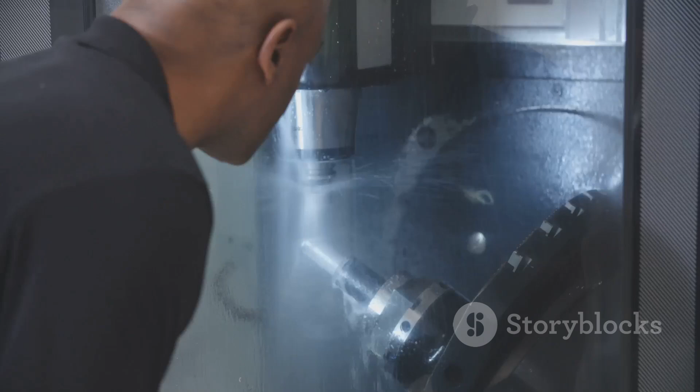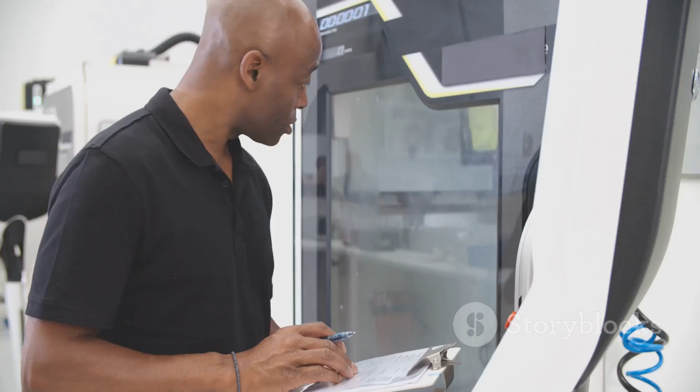Let's talk about CNC machining. This technology is amazing. We can create incredibly precise parts from digital designs, but even the most advanced CNC machine is only as good as the instructions it receives. That's where clear, accurate technical drawings come in. They are the language we use to communicate our design intent to the machinists who bring our ideas to life.

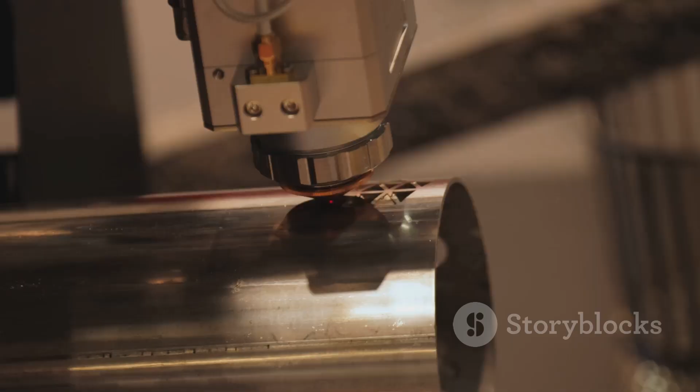Think of it like this: you wouldn't build a house without a detailed blueprint, right? The same goes for CNC machining. A clear drawing is the blueprint for your part. It tells the machinist everything they need to know to make your vision a reality.

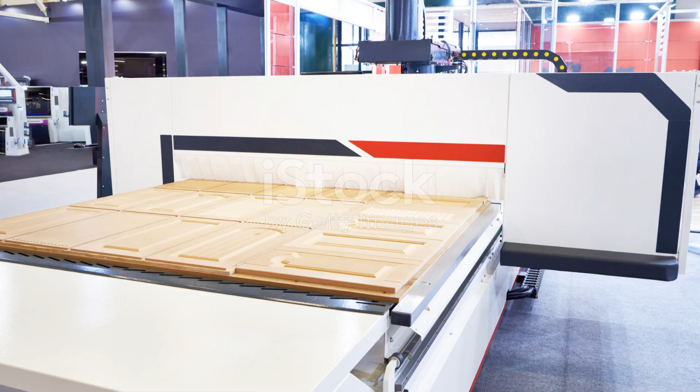A well-crafted drawing ensures everyone is on the same page, from the engineer to the machinist. This shared understanding is crucial for preventing errors, reducing waste, and ultimately, saving you time and money.

Imagine this: you've designed an awesome new product. You've spent hours, days, maybe even weeks perfecting it in your CAD software. You send the drawings off to the machine shop, excited to see your creation come to life. But when the parts arrive, they're not right.

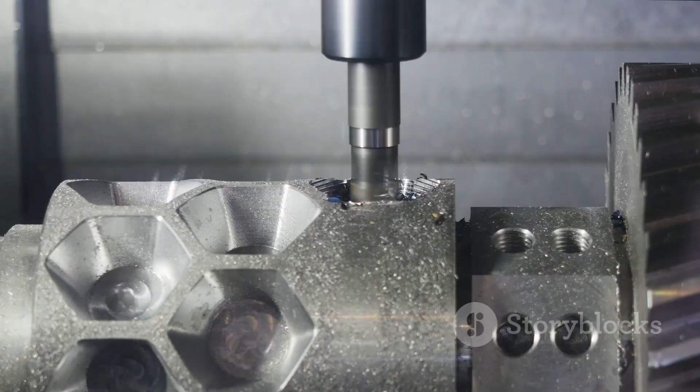Something is off. Maybe a hole is in the wrong place, a dimension is incorrect, or the finish is rough. Now you're facing costly rework, production delays, and a whole lot of frustration. This scenario is all too common, and it often boils down to unclear drawings.

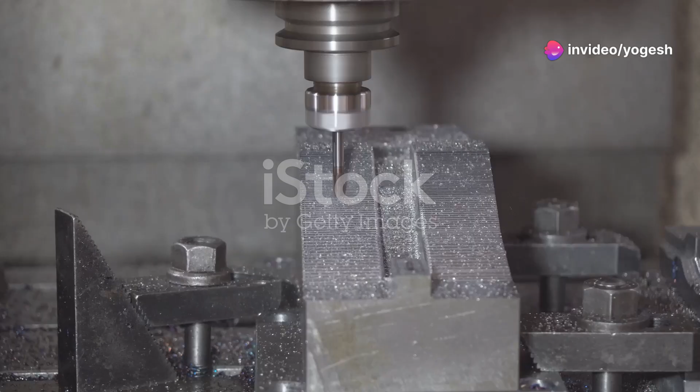A seemingly small error or omission in a drawing can have major consequences in the machine shop. A missing dimension, a misplaced symbol, or an ambiguous note can lead to misinterpretations, wrong cuts, and ultimately scrapped parts.

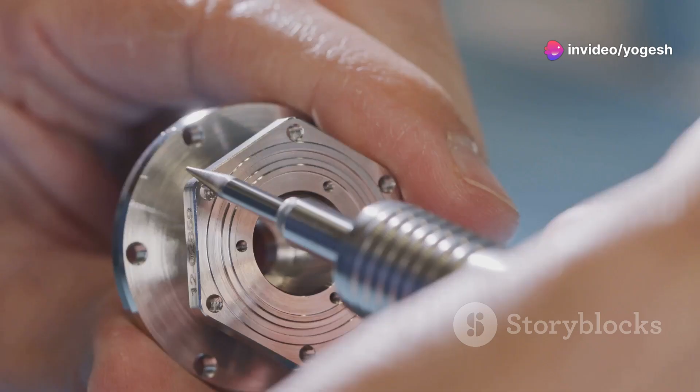Clear communication is key. That's why mastering the art of creating clear and accurate technical drawings is essential for anyone involved in CNC machining. It's about more than just lines on paper. It's about ensuring your designs are manufactured exactly as you envision them.

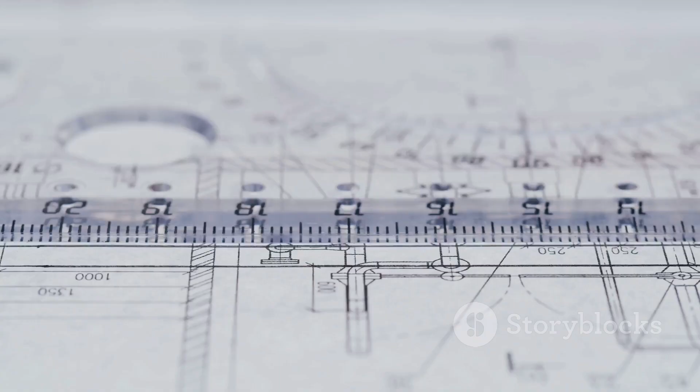Every great building needs a solid foundation, and the same goes for technical drawings. The title block is the foundation of your drawing, providing essential information about the part and the drawing itself. Think of it as the ID card for your part. A well-organized title block should include part name. This one is pretty self-explanatory.

Drawing number. This unique identifier helps you keep track of different versions of your drawing. Revision number. As you make changes to your design, the revision number helps you track the latest version. Material. Let the machinist know what they'll be working with: aluminum, steel, plastic, etc.

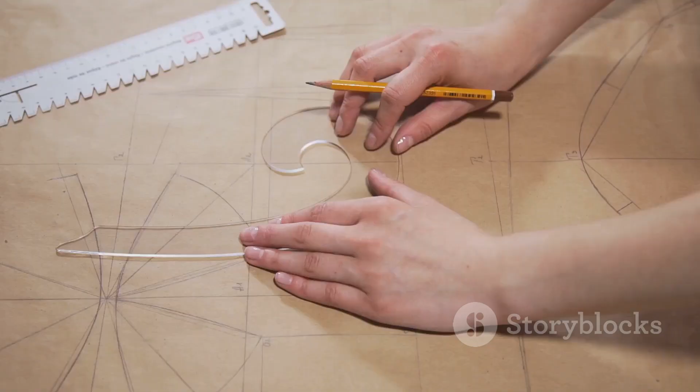Units. Specify whether you're using inches or millimeters to avoid any confusion. Scale. If your drawing isn't drawn to actual size, the scale tells the machinist how to interpret the dimensions. Surface finish. More on this later, but this specifies how smooth or textured the part's surfaces should be.

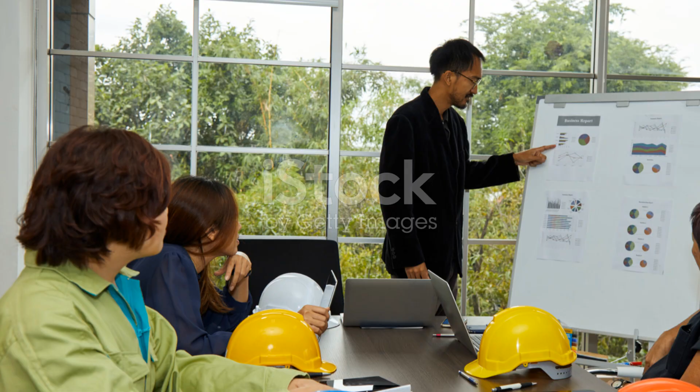A clear and complete title block ensures everyone is working from the same information and helps prevent costly mistakes down the line. So, take the time to fill it out accurately and thoroughly.

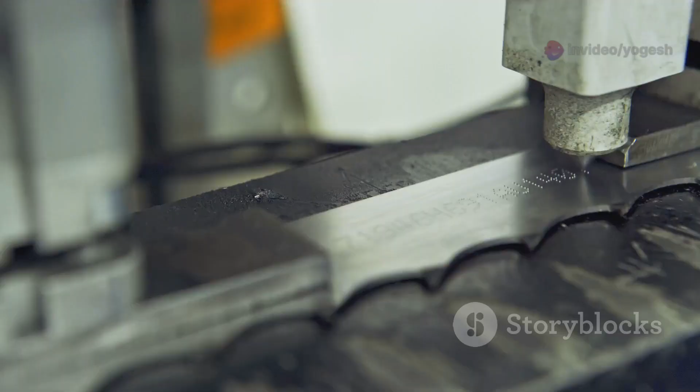The heart of your drawing lies in the depiction of the part's geometry, its shape, size, and features. This is where your design truly comes to life on paper. Clarity is paramount here. Here are some tips for clear geometric representation. Orthographic views. Use standard orthographic projections, front, top, side, to show the part from different angles. Think of it like taking pictures of your part from different sides.

No clutter. Keep your views clean and uncluttered. Avoid unnecessary lines or details that could cause confusion. Proper line weights. Use different line weights to distinguish between visible edges, hidden edges, and center lines. This helps the machinist understand the part's 3D form.

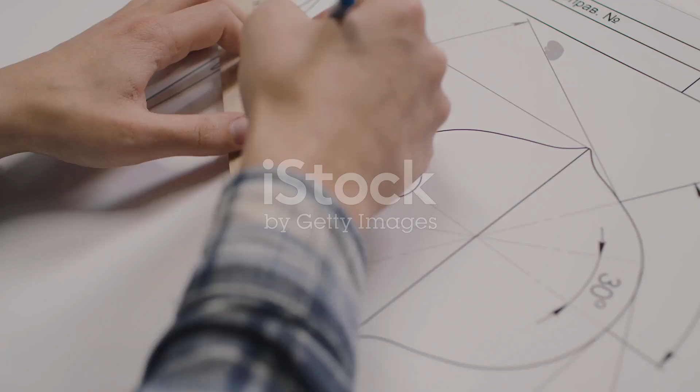Remember, the goal is to create a drawing that is easy to understand and interpret. Avoid any artistic flourishes or stylistic choices that could obscure the part's geometry. Think of it as technical communication, not fine art.

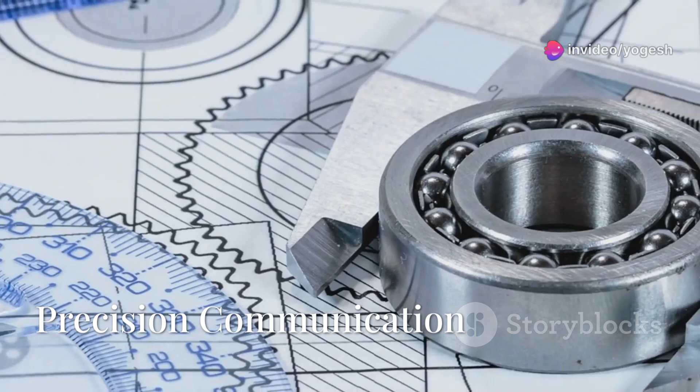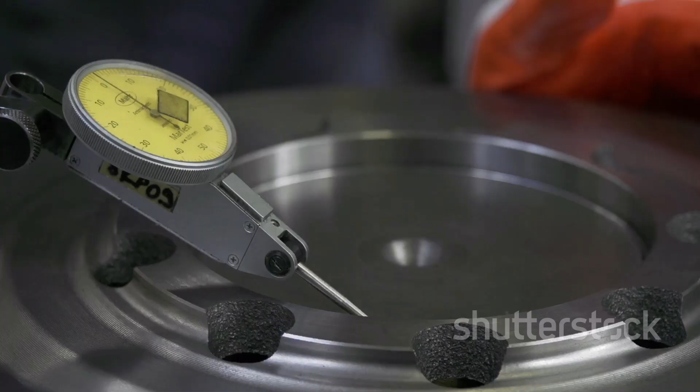Section 5. Tolerances and fits: precision communication. In the world of machining, precision is key, but we don't live in a perfect world, and manufacturing processes have inherent variations. That's where tolerances come in. Tolerances tell the machinist how much variation is acceptable for a given dimension. Critical dimensions: identify the most critical dimensions that directly impact the part's function. These dimensions need the tightest tolerances.

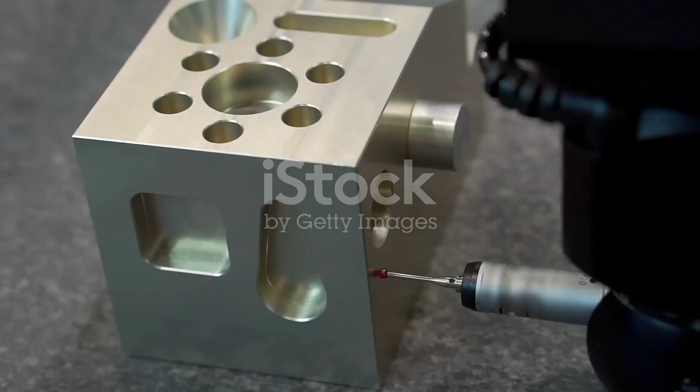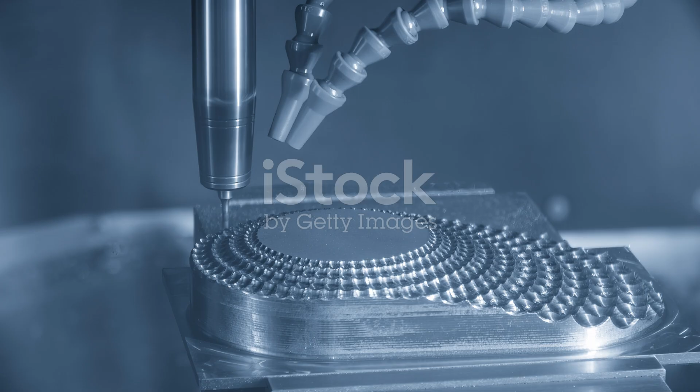Limit dimensions: clearly indicate the upper and lower limits for each dimension. This gives the machinist a clear range to work within. Hole fits: specify the type of fit required for holes and shafts, for example, clearance, location, or press. This ensures proper assembly and functionality. Clearly communicating tolerances ensures that your parts will fit together as intended and function properly. Remember, precision is in the details.

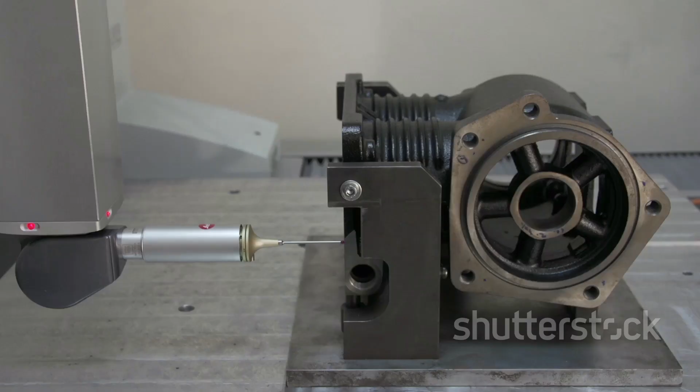Section 6. Surface finish: the feel of quality. The surface finish of a part can be just as important as its dimensions. It affects the part's aesthetics, how it interacts with other parts, and even its durability. Use Ra, or roughness average, values to specify the desired surface roughness. Lower Ra values indicate smoother surfaces.

Familiarize yourself with standard surface finish symbols and use them consistently on your drawings. Whether you need a mirror smooth finish or a more textured surface, clearly communicating your surface finish requirements ensures the final part meets your expectations.

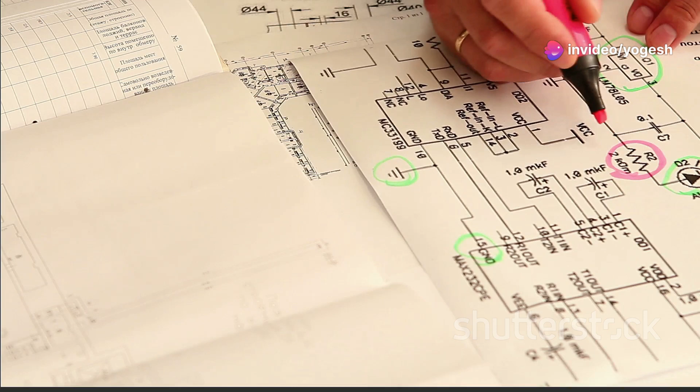Section 7. Datum references: the anchor of accuracy. Datum references are like anchors for your dimensions and tolerances. They establish fixed points of reference on the part, ensuring that all measurements are taken from the same starting point. Geometric dimensioning and tolerancing, or GD&T, is a powerful system for defining and communicating datum references and geometric relationships.

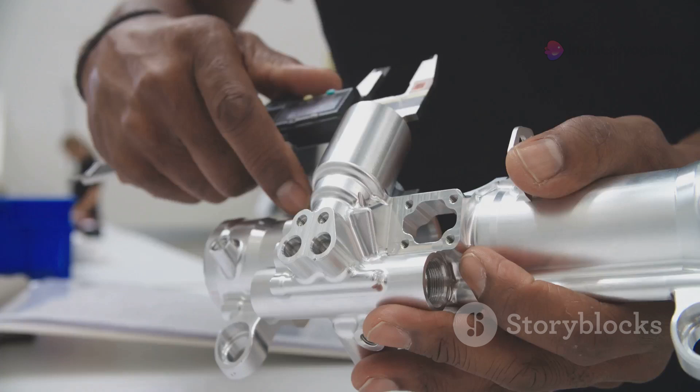Use GD&T symbols to control the location, orientation, and form of features relative to the established datums. By clearly defining datum references, you ensure that all features are manufactured in the correct relationship to each other, resulting in a part that assembles and functions as intended.

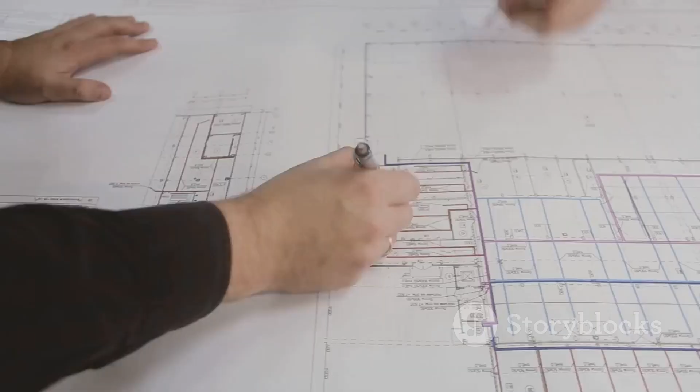Section 8. Avoiding ambiguities: double-checking for clarity. Before you send your drawings off to the machine shop, take the time to double-check for any potential ambiguities or inconsistencies. A few minutes of careful review can save you hours of headaches later on. Avoid redundant dimensions that could lead to conflicting information.

Ensure that all dimensions and tolerances are consistent across different views. Carefully compare different views of your part to make sure they all agree. Remember, the devil is in the details. A thorough review process helps catch errors early on, ensuring that your drawings are clear, accurate, and ready for manufacturing.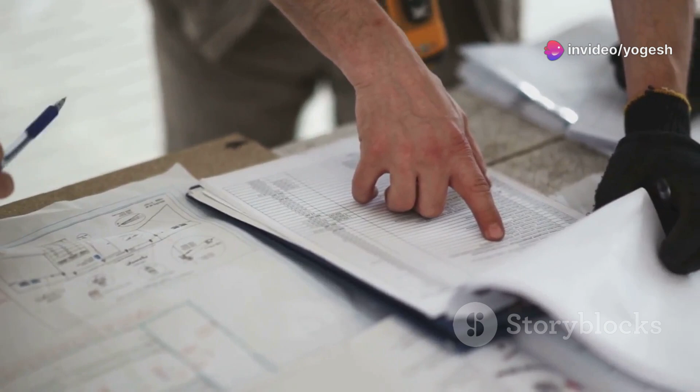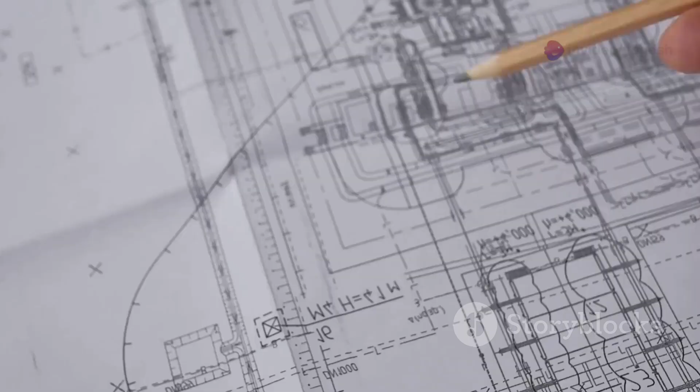Section 9. Checklist for success: your blueprint for flawless CNC machining. Congratulations! You're well on your way to creating crystal clear technical drawings that will make your machinist happy and your parts come out perfectly. Here's a handy checklist to use as a final review before you hit send on those drawings. Part name, drawing number, and revision number are clear and accurate. Material, unit, scale, and surface finish are specified.

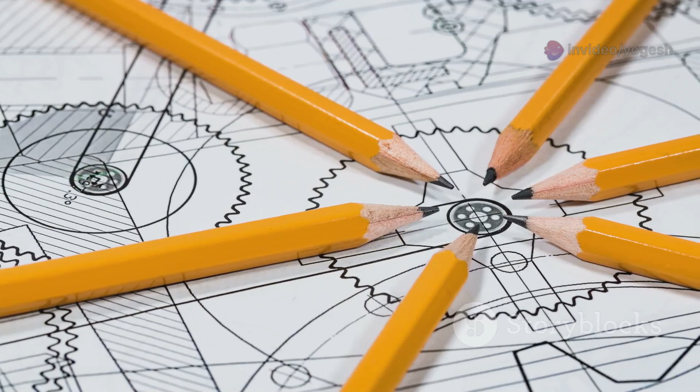Orthographic views are used to show all sides of the part. Views are clean, uncluttered, and easy to understand. Proper line weights are used to distinguish between different types of lines. Critical dimensions have appropriate tolerances. Limit dimensions are clearly indicated for all features. Hole and shaft fits are specified for proper assembly. Ra values or surface finish symbols are used to specify surface roughness.

Datum references are clearly defined using GD&T. Geometric tolerances are used to control the location, orientation, and form of features. Drawings are free of ambiguities and inconsistencies. Dimensions and tolerances are consistent across all views. All views have been cross-checked for accuracy.

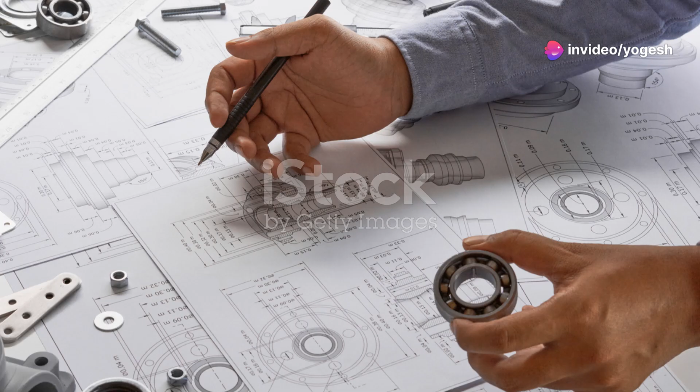By following these guidelines and using this checklist, you can ensure that your technical drawings are clear, concise, and error-free. And that, my friends, is the key to unlocking the full potential of CNC machining and bringing your designs to life with precision and accuracy.